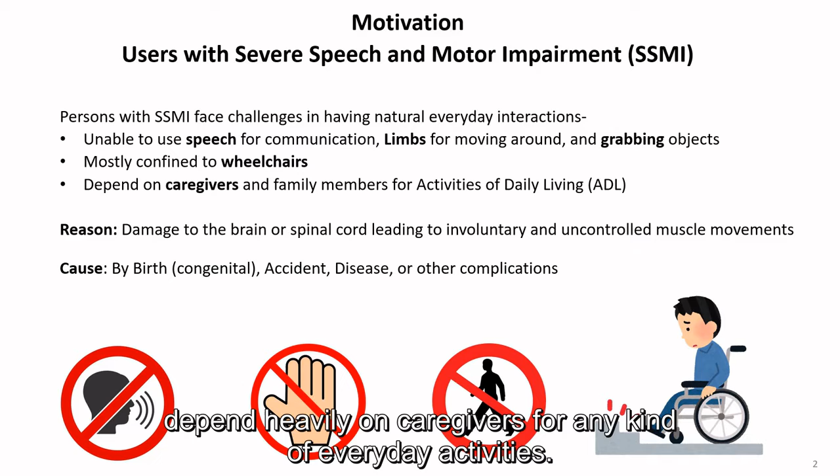Our motivation for this work are the users with severe speech and motor impairment. They belong to the most isolated section of the disability spectrum. They can't use speech for communication or limbs for movement and manipulation. Persons with severe speech and motor impairment are confined to wheelchairs because of involuntary muscle control and depend heavily on caregivers for any kind of everyday activities.

There are numerous assistive solutions available, like head wand and mouth stick for writing and interacting with touchscreens, and alternative and augmentative communication boards for everyday needs. But these solutions are physically demanding and exhausting. They rely on voluntary motor and muscle control, which is difficult for our targeted end users. The affordability and accessibility of these solutions also poses a challenge to our end users.

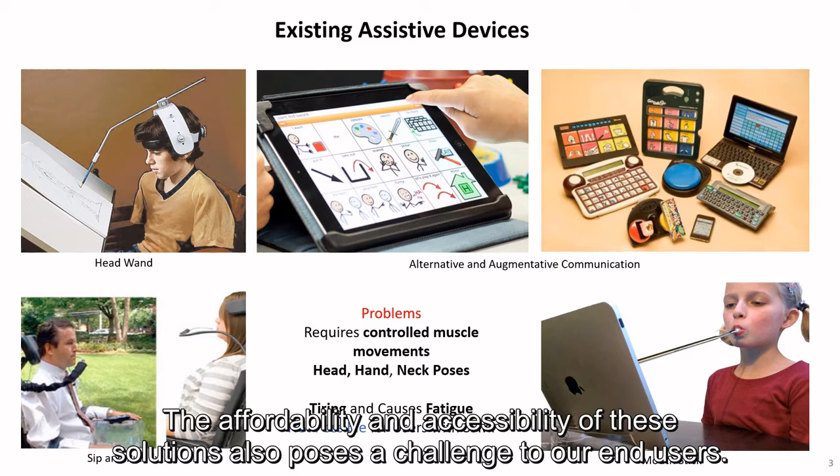So the users with SSMI have to rely on manual eye tracking based communication, where a caregiver or a family member has to physically hold an eye spell chart in front of the users and manually analyze the point of gaze of the user on the chart to make sense of what the user is trying to say. This process is time taking and error prone. It is also physically tiring for the caregiver and adds to the fatigue and stress.

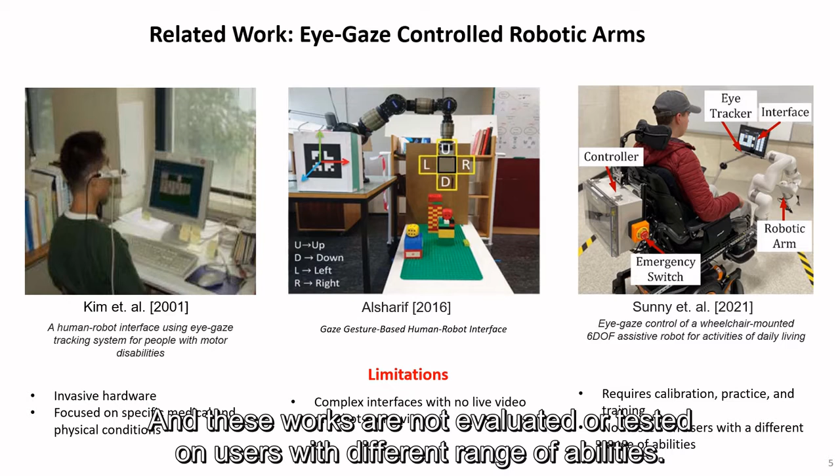For more than 2 decades, researchers have worked on exploiting the familiarity of the targeted users with eye gaze pointing for building eye gaze controlled assistive solutions like robotic arms and wheelchairs. Many of these solutions focus on users with specific medical conditions and use invasive and expensive hardware. These systems often require calibration and training for correct usage, and many of these works are not evaluated or tested on users with different range of abilities.

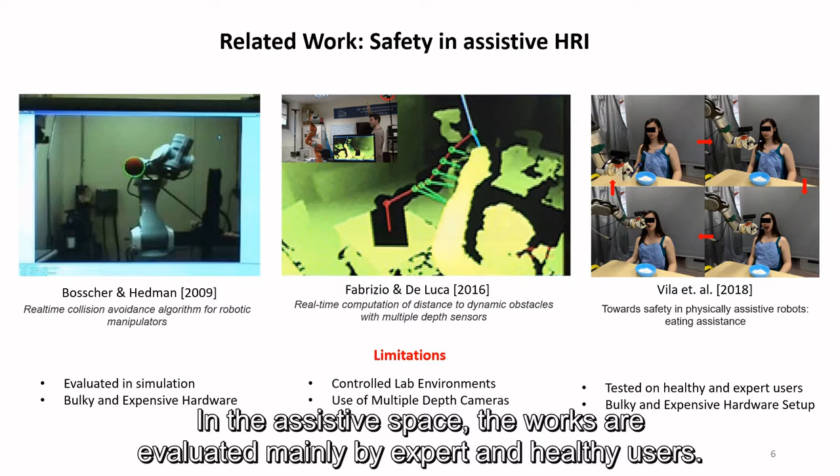When working with robots around humans, ensuring the safety of humans is crucial. Researchers have come up with different safety strategies which are evaluated in simulations and controlled lab environments using multiple depth cameras and other expensive hardware. Most of these works are done for bulky industrial robots. In the assistive space, the works are evaluated mostly by expert and healthy users.

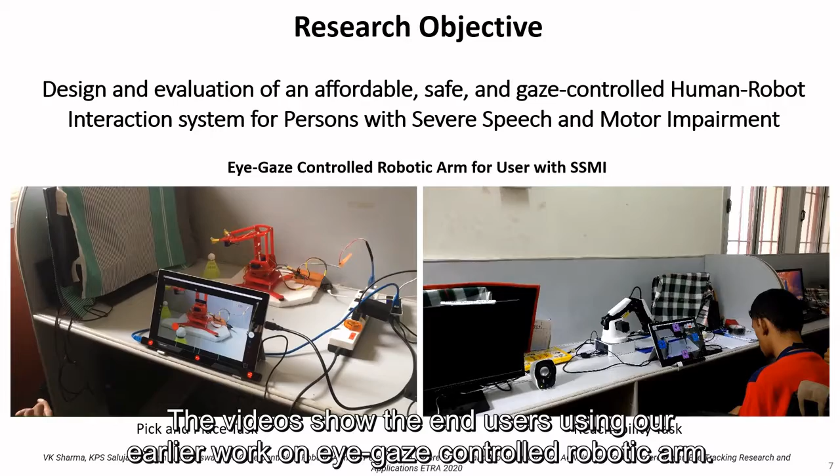Our research objective is design and evaluation of an affordable, safe, and gaze-controlled human-robot interaction system for persons with severe speech and motor impairment. The videos show the end users using our earlier work on eye gaze-controlled robotic arm for pick and place and reachability tasks using commercially available eye trackers.

To make the proposed system affordable and accessible to a wide range of targeted users, we used a deep learning approach for appearance-based gaze estimation, which gives eye gaze points on the screen by using the RGB images from the inbuilt web camera of the laptop. This approach was completely non-invasive, user-agnostic, and required no calibration.

For our case, we are using a tabletop robotic arm that has small operating torques and velocities. Given the small form factor of the robot, the problem of detecting and avoiding any collision with humans to ensure their safety is narrowed down to detecting and avoiding collision with hands in the robot workspace.

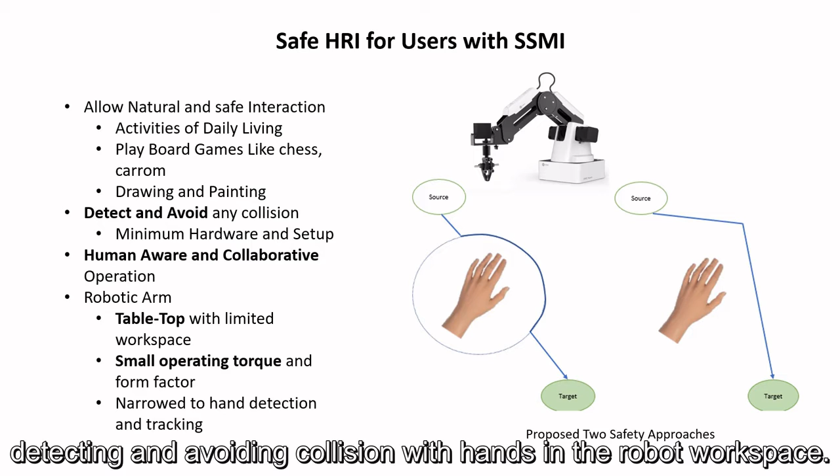We used a robust hand tracking solution from Google called MediaPipe Hands. It can detect human hands at 30 frames per second while running on ubiquitous devices like laptops and smartphones without any high computational requirements like GPUs.

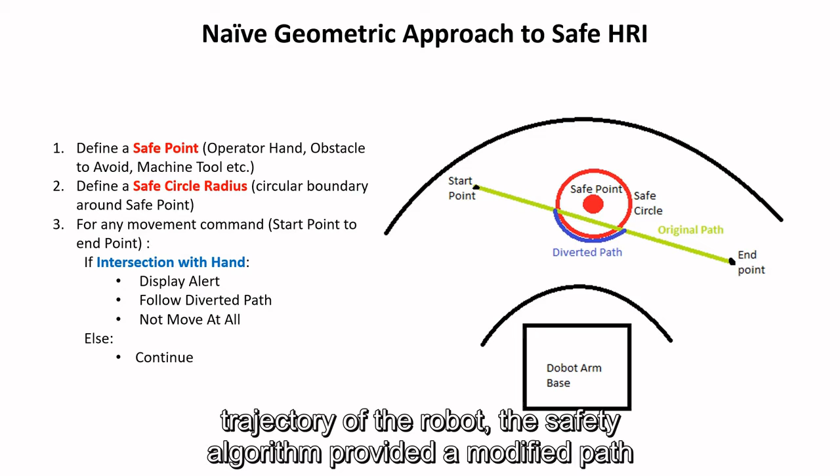Our first approach to safety was a naive geometric one, where the human hand is approximated as a circle, and if the hand circle intersects the trajectory of the robot, the safety algorithm provided a modified path based on the level of intersection. The second approach to ensuring safety was a more intelligent one.

Here, the robot workspace has been approximated as a 2D Markov decision process grid. The grid cells occupied by hand are designated as obstacle and given a respective negative reward, and target locations are given a positive reward. The optimal robot trajectory is obtained as a result of a value iteration algorithm trying to maximize the overall utility based on the best possible actions the robot should take at each state.

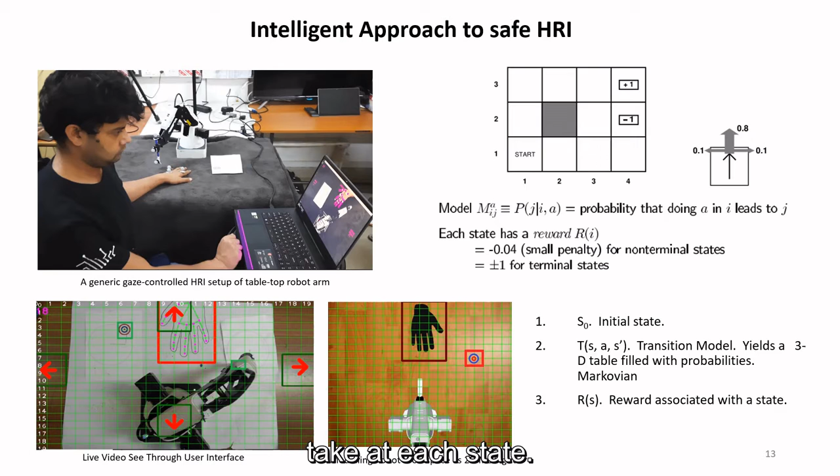This approach allowed us to accommodate any uncertainty in the robot motion caused due to the errors in the robot workspace to screen mapping. The intelligent algorithm gave a more conservative or longer path for higher uncertainties.

The same approach can also be used to get safe navigation in case of a moving hand situation, where the algorithm keeps a note of the historical positions of the hand while calculating the optimal path to the target. The intelligent algorithm also provided robot trajectory in case of multiple obstacles present.

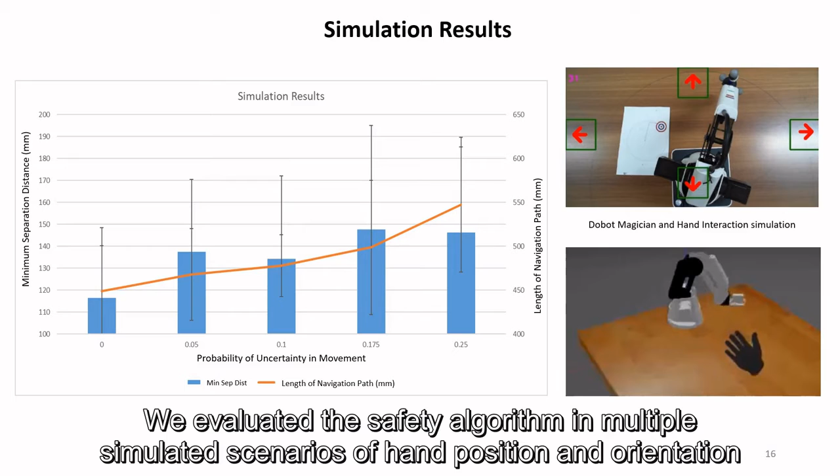We evaluated the safety algorithm in multiple simulated scenarios of hand position and orientation in the robot workspace. The results showed that a longer navigation path and higher minimum separation distance was obtained for increasing uncertainties.

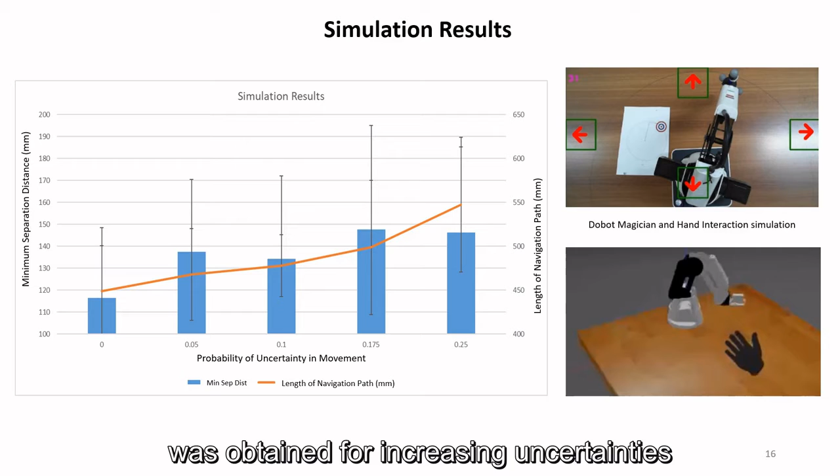We also performed user trials with the end users with severe speech and motor impairment. We found significant differences in task completion times of the end users and the healthy users. Both the user groups improved their performance in the subsequent trial. The intelligent algorithm could maintain a larger minimum separation distance as compared to the circle-based geometric approach.

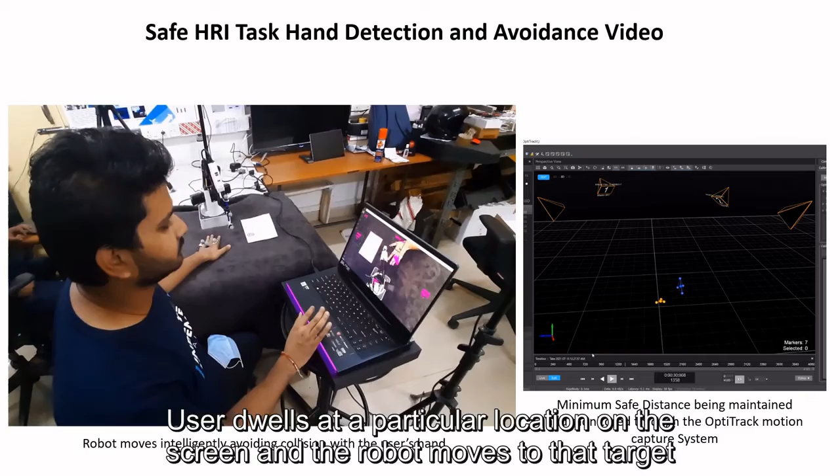This video shows a healthy participant performing the task. The right window shows the motion capture scene of the same. User dwells at a particular location on the screen and the robot moves to that target location, avoiding the user's hand. We have extended the proposed human-robot interface to let our users drive a toy car using their eye gaze on a screen-based augmented reality interface.

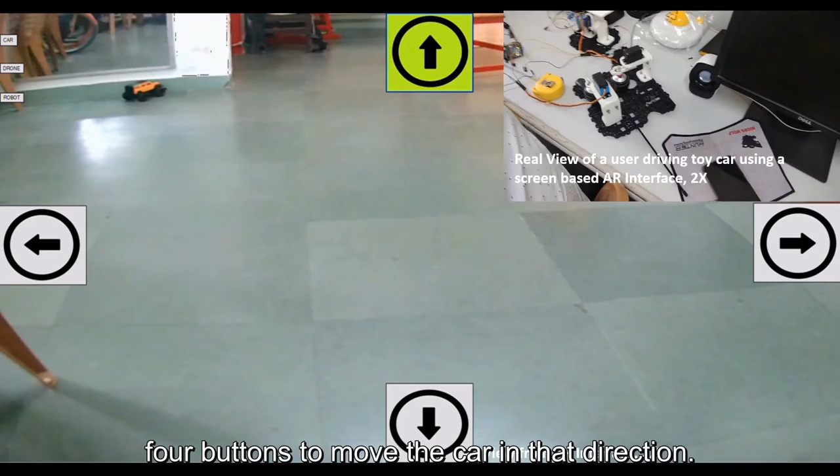The users can look and dwell for half a second at the four buttons to move the car in that direction. This interface can be used to train the users to practice everyday tasks and activities.

This system can help and support the caregivers and family members by taking some load off of them and providing an engaging edutainment activity to them.

We are organizing a workshop for the end users using the proposed human robot interface in October. Thanks for your attention.